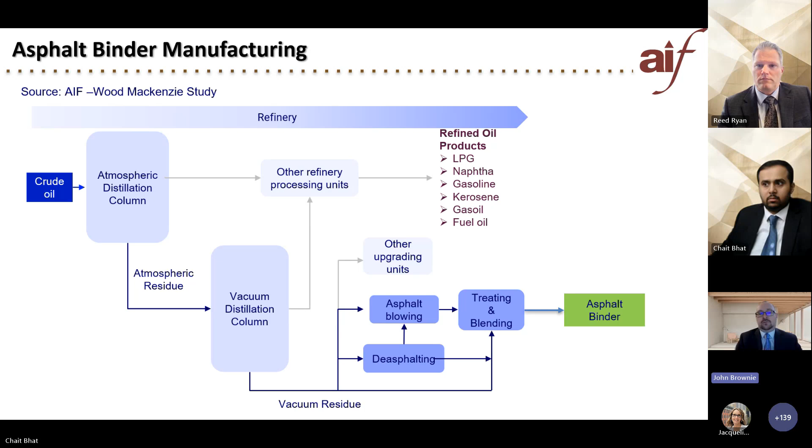And this is a very simplistic view of our, call it cradle to gate within the asphalt refinery for the production of asphalt binder. And I really want to tie into that crude oil piece. So the dynamics of this and the refining industry are tied to the energy transition. So understanding this and understanding crude oil demand and other petroleum product demands is critical to understanding what is required and what the supply scenarios look like for asphalt binder, because it is integrated with the rest of these materials and their uses. So that's critical for this slide and what we do.

Now, switching gears a little bit and talking more specifically about the study, Wood Mackenzie has an energy outlook. And what they have done is they've modeled a base case scenario that takes into account a number of different elements. It takes into account supply and demand elements across various sectors, understanding what technologies exist, what technologies could exist in the future, and what the economics of all of these processes are, and what is required from a carbon emissions standpoint. It uses these to build a base case model and then looks at other scenarios to build out what that energy outlook scenarios look like under those different requirements within the system.

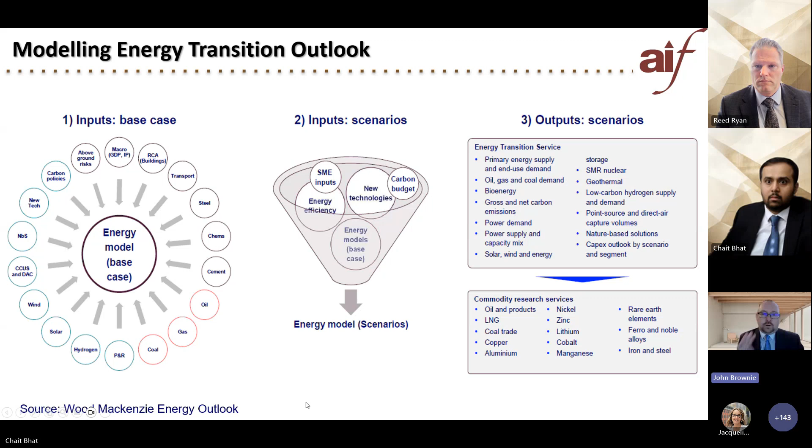Okay. Now, one other element I did want to highlight: in 2023, when we started this study, the Wood Mackenzie Energy Outlook stated that the base case scenario was the most feasible scenario for the energy transition based upon the current realities of the world. More recently, in 2025, there is another scenario that has been generated that is a delayed base case scenario that has a global warming potential limited to 3 degrees Celsius. And that's due to many of the geopolitical tensions that have been generated over the last year and a bit. I'm not going to discuss that in great detail. It wasn't part of the AIF Foundation study, but I did want to put that there as a piece of context for these three scenarios and the likelihood of what transpires over the next number of years out until 2050.

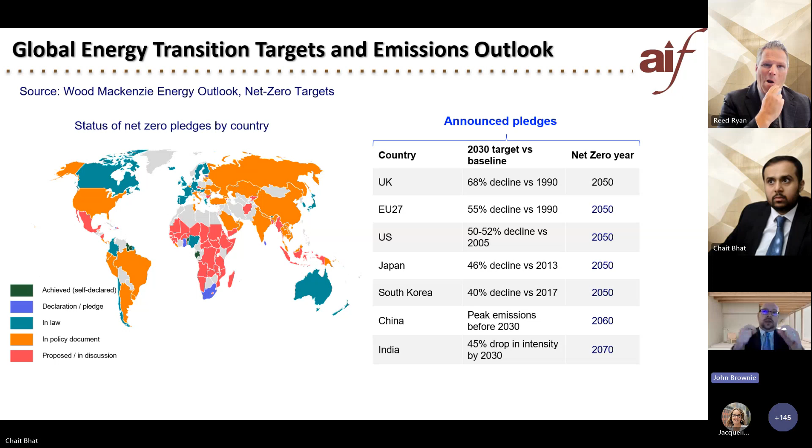We've covered the asphalt binder manufacturing process. And now I want to transition to the outcomes of the energy outlook and what that specifically means to the impact on crude oil demand, by scenario, because again, tying back to what I talked about, crude oil and the refining and petroleum industry is going to be critical to understanding our asphalt binder manufacturing.

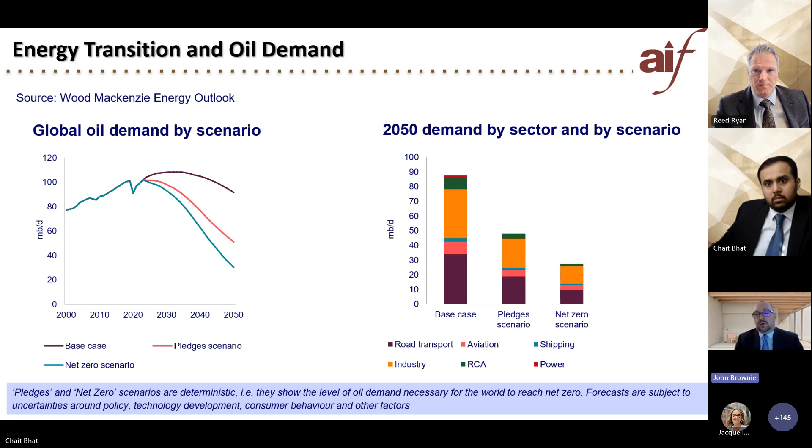And so that changes the fuels demand scenario and lowers that going forward as we change energy sources for the vehicles. But what's really critical to me and for our asphalt industry is that the vehicle fleet continues to grow. So more vehicles, more people and goods to be moved. So we need to maintain and improve our road networks, which ties to the demand scenario of asphalt and asphalt binder production in this study.

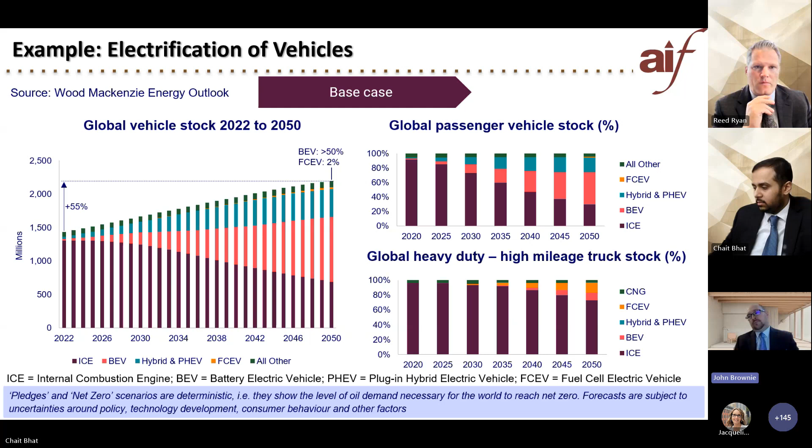And I think that's really the important implication that I want to walk away with, is this is part of the reasoning behind how the energy transition occurs and what the implications are from a petroleum demand perspective in each of the scenarios, but what it means to the road industry.

And that's important to understand what this means for the future of binder supply and the choices that will drive that in the future. Okay. All right.

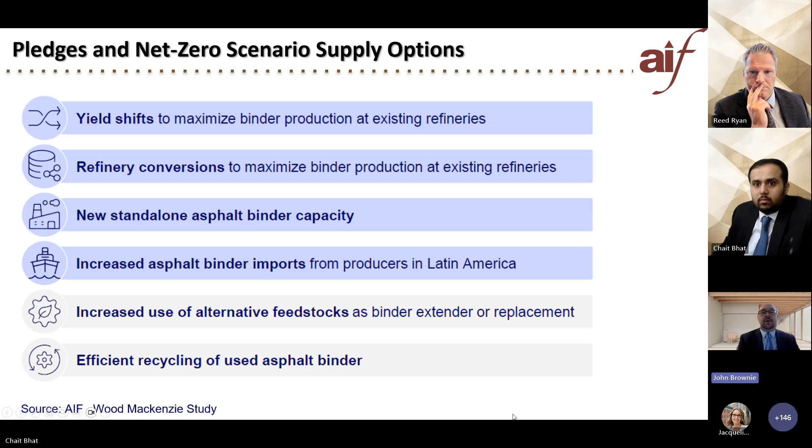So that covers holistically the story of looking at what are the energy transition scenarios. What does that mean to the petroleum crude oil scenario? What does the pace mean for the various scenarios? And then translating that right through to asphalt binder supply under these different scenarios, and understanding then what are the implications for supply versus what exists today, and what would have to happen in the future to allow that to occur.

Chait is now going to take the second portion of the talk that really talks about those scenarios where there is a global warming potential limit. We talked about those in the scenarios. He'll talk about what your choices are around potential carbon emissions from asphalt binder production and use, so going beyond the gate, and what that means under each of the scenarios. So Chait, I'll leave it to you.

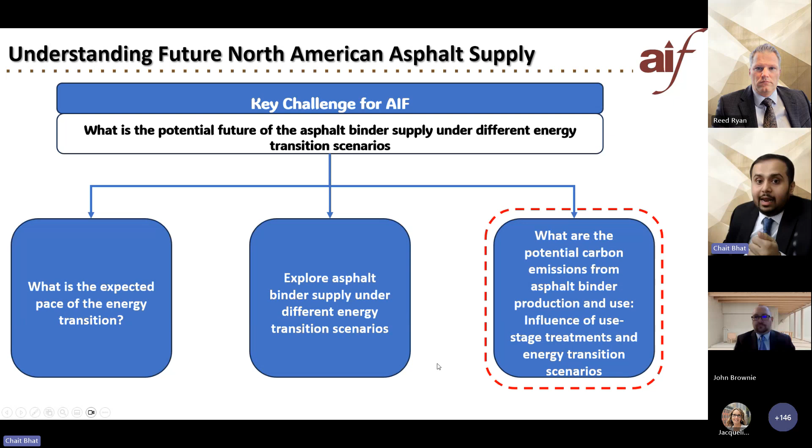However, before going into the actual case studies, let's set some stage because I know there are audience coming from the upstream supply chain participating in this webinar, as well as third-party stakeholders. So for those who might not be familiar with our pavement or road arena, this is what we refer to as a life cycle of a road or a pavement, starting with asphalt pavement, which is our interest here.

As John mentioned, the cradle starts all the way from crude extraction to the transportation to the refineries, and then to terminals, use of various additives like polymers, then to a hot mix asphalt plant where the liquid binder is blended with aggregates at higher temperatures to make it compactable. That's transported by a contractor and laid down. So that might be a new construction. But once it's done, then it's exposed to traffic and climate.

So there is your pavement and vehicle related interaction and the indirect emissions, what we call operational emissions from the actual vehicle use. But then there's also emissions from the maintenance activities. So depending on how bad your road is, a public agency who are the owners of the roads, like the State Departments of Transportation, might decide to do different preservation maintenance treatments to make sure that the road is suitable for users.

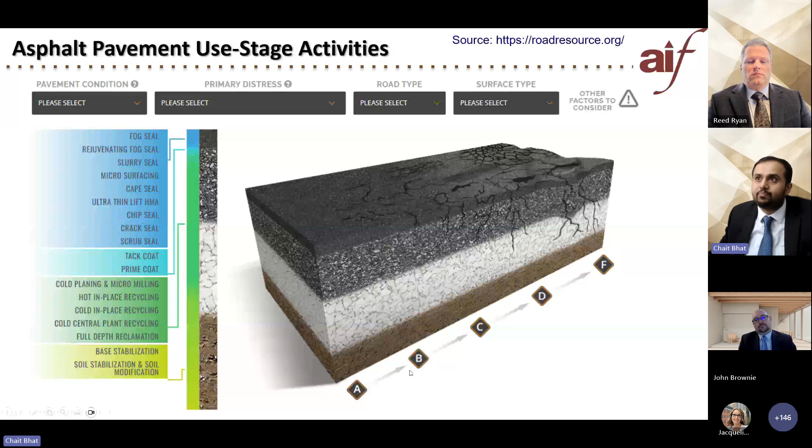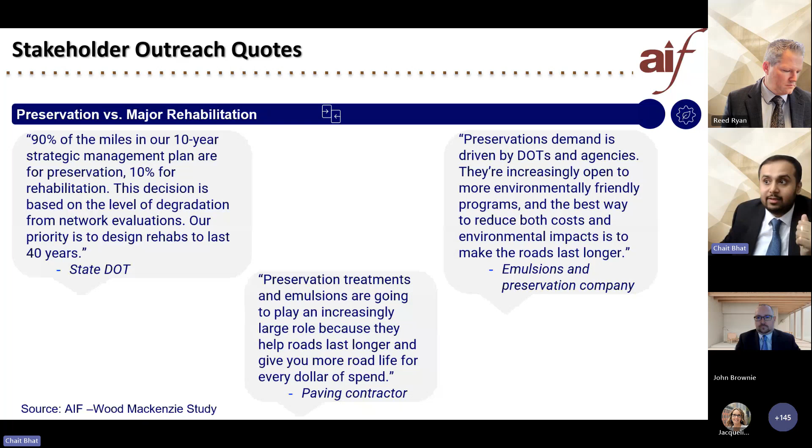Sorry for this busy slide, but this is before going into the numbers, because for me, while doing an LCA, I tell all the students that are currently working on life cycle assessment, don't focus on the end results, focus on the hypothesis and assumptions behind your numbers, right? And for the public agencies that might be listening to this webinar, Asphalt Institute throughout has been supporting context-specific pavement life cycle assessments. What I mean by that is, what might work for your Indiana roads might not work for your California roads, or might not work for your Minnesota roads.

We are doing this kind of pavement LCA as a snapshot in time analysis, and not to say that this is the universal solution. So the owners of the roads at those respective agencies should make sure that this kind of an analysis is done whenever they are trying to incorporate potential carbon emissions within the decision making.

So 3 examples. First example is, I mentioned before that asphalt is the most recycled material, right? Asphalt mixture. So first example is what we typically see within a state agency. Let's say there is a new road construction that happens at year 0, and they wait till, let's say, it fails. Like when I say fails, the whole asphalt surface kind of degrades to like 2 inches, 3 inches, 4 inches. Then they go in and take out that asphalt surface and then pave it back again. That's what we call mill and fill rehabilitation activity.

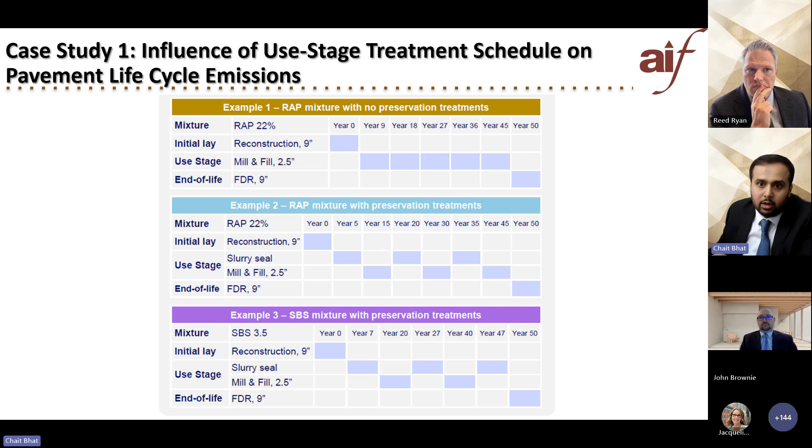So in the third use case, the assumption that we have made there is instead of your slurry seal at year 5, as in example 2, your slurry seal would be at year 7, and your mill and fill would get pushed out to year 20. Looking at these 3, so the previous slide told you about what the agencies are going to be prioritizing, right? In this slide, taking those agency insights, we came up with 3 case studies. So let's see, from an environmental sustainability quantification perspective, is what the agencies are thinking making sense or not? Turns out our public agencies are right.

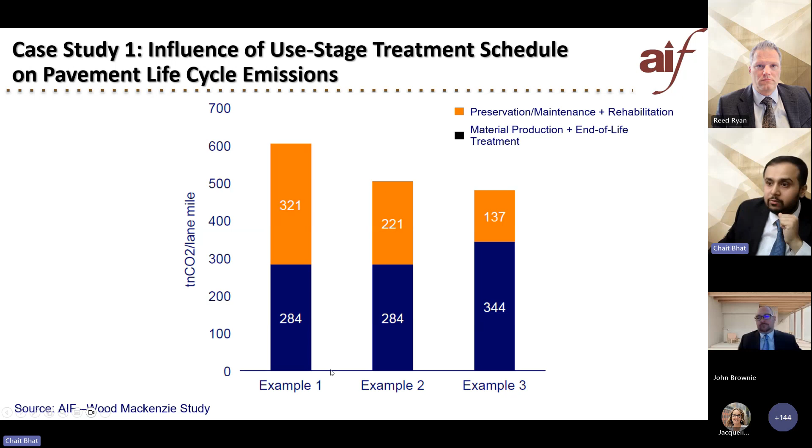But what's to note here is in example 3, the initial material extraction is higher because of the use of that polymer. But what that's doing is in the use stage, it is requiring lesser preservation as well as lesser rehabilitation. So when you look at the cradle to grave emissions, your example 3 turns out to be the most sustainable option, right? So what our public agencies are prioritizing in terms of preservation and longer life seems to be the right option, even from an environmental sustainability quantification perspective. So that's case study 1.

Case study 2, John talked about 3 different energy transition scenarios, right? So within the 3 examples that we talked about before, let's take example 2, where we are using 22% RAP asphalt mixture, slurry seal at year 5, using the existing practices of asphalt binder production and use.

All the fuels are the same, all the construction equipments are the same. This is what we get. 505 is the overall cradle to grave emissions. Another key thing to notice here is your use stage is the predominant contributor when you look at your cradle to grave. We are still not including the operational carbons. This is just the use stage from the actual treatments, but that's what your number looks like.

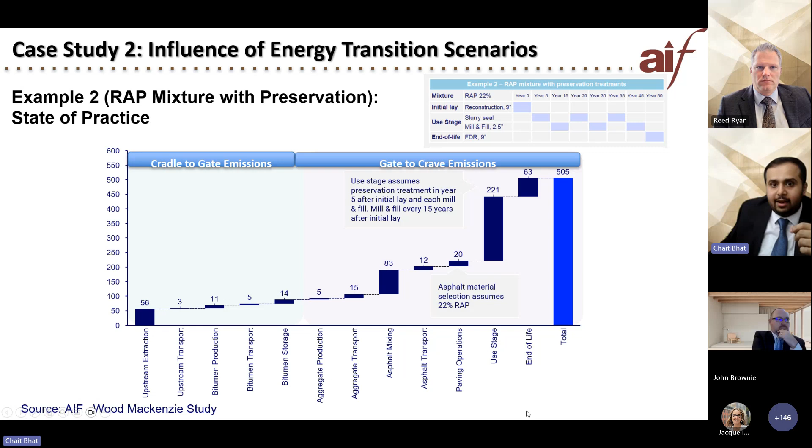Now, when I do a prospective life cycle assessment, in order to do that, let's first look at assumptions, right? Now, energy transition scenarios in the pledges case, net zero case, what are those things that will change? There are two portions to it. One is during the asphalt binder production, all the way from your crude extraction to your refining to your terminal. So during those, things like electrification of your platforms of crude extraction, as well as drilling equipment, use of carbon capture sequestration technologies, or from Canadian oil sands, let's say if they are using some solvents, all of these, Wood Mackenzie projected, will reduce the carbon emissions.

Now, during the use, that is mixing with aggregate as well as paving it and then maintaining it, there are multiple options there as well. One thing I would mention here is each of these options, not everything is of the same feasibility level, right? Each of them need different economic incentives, different technical feasibilities. For the sake of our analysis, these are the options we are considering to see how much are we able to reduce from the state of the practice for that example 2.

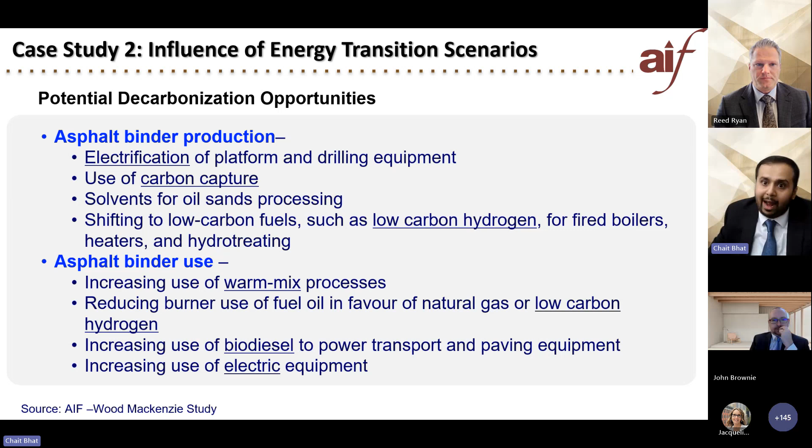In this very busy slide, the things to actually take from it is, if I do just the base case, so Wood Mackenzie told us that base case is the most likely scenario, right? From the asphalt supply perspective, we are still able to reduce up to 24% of emissions. And that's from your technological innovations in your crude extraction all the way to your grave. But when you look at the net zero, from all the options we talked in the previous slide, we can reduce up to 58%.

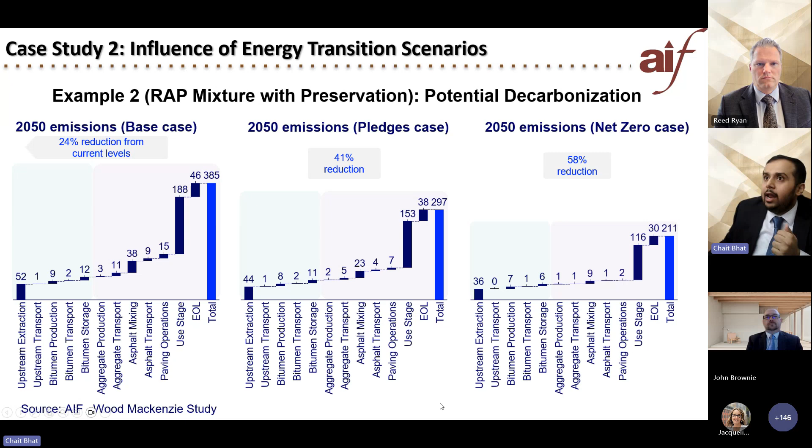Now, one thing that I will mention here is we have not considered the use of any bio-based additives in our analysis that contain biogenic carbon. So for our snapshot in time analysis, we considered everything that was standardized as of now, for which material specifications are standardized and practice is standardized. So in future, if there are any bio-based additives that are used, that might reduce the number more. But from our analysis, this is what we see from a cradle to grave perspective, the potential emission reductions. I'll now pass on to Reed to conclude our presentation.

Thanks, Chait. I appreciate that. And as we have this slide up here for everyone and we review what's been presented to us today, I think there are some fundamental assumptions that we can make as far as concluding thoughts. I want to get to a few of those in just a moment and ask a few questions before we get to that. But here you have an understanding that the base case is our most likely scenario that was closely examined. That asphalt binder will remain in demand throughout this transition and shift, and that the supply should remain relatively stable under that base case scenario, which I think is good news for all of us.

And now the opportunity lies with refiners, right? When we talk about upstream, about what their choices are before them. And obviously the economics of all of that will drive those decisions. But the good news for us is that, as John mentioned in his portion of the presentation, we still are part of a world that relies on roads, and those roads play an integral part. And asphalt obviously plays over a 90% part in the construction of most of those roads, when you consider 94% of the roads are built in asphalt in the United States. So the converse of all of that is, can we do better? Can we continue to progress as an industry?

And Chait really took that by the reins and laid out for us various things to consider when it comes to our carbon emissions. And there you have some of that data presented before you. So the key takeaway for me in all of this is that it takes all of us. It's an interesting thought as I ponder this, 2% of the barrel, that so much in that 2% is driven by 100% of our industry, and all of the things that we do together collectively, from the design and engineering to the construction to the use to the preservation and maintenance, and then to the recyclability of the product, of which we have all made our careers, and all that we consider with that.

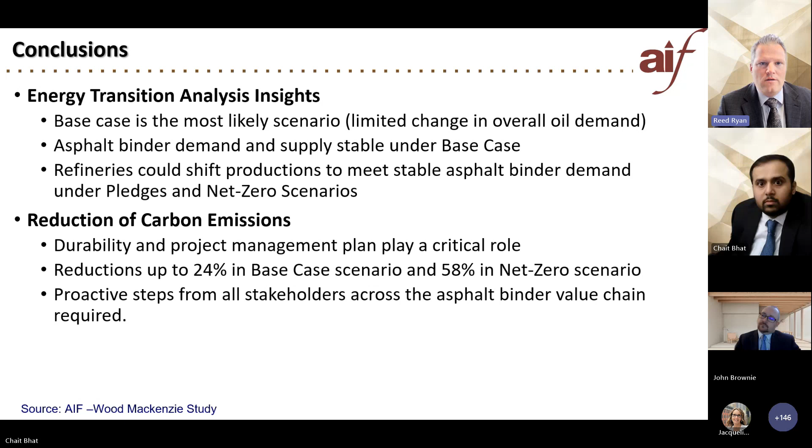The takeaway for me is that it will take all of us. And this is the opportunity that I think has been presented to us. So John and Chait, I'd love to defer to you if you have any additional concluding thoughts. Otherwise, I'm going to talk a little bit about some questions that Jacqueline has helped supply over to me as you were speaking, and then we can take it from there if you all want to share a thought or two, and then I'll ask you a couple questions.

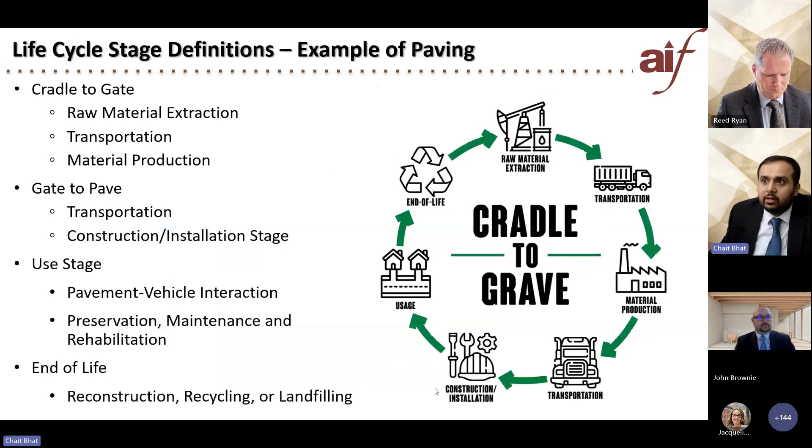No, Reed, just one thing to add, and John clearly elaborated it. The main metric to consider, and I'll go back to that slide here within the three scenarios, is the economic feasibility and the amount of incentives required, right? So the ever-evolving market, what we see here is you would need like $55 trillion for your base case. And for your true net zero case, you'll need like 78 trillion. And that's cumulative investment between 2024 to 2050 by all countries globally.

To give a context of what that looks like GDP-wise, US's GDP was 23 trillion in 2023. And for a country like India, where I originally come from, it's 3 trillion. So Wood Mackenzie's projections are based on the economic feasibilities as well as the technical innovations that are parallel to those feasibilities. So that's very important for us to note. So John, if you had anything to add to that, yeah.

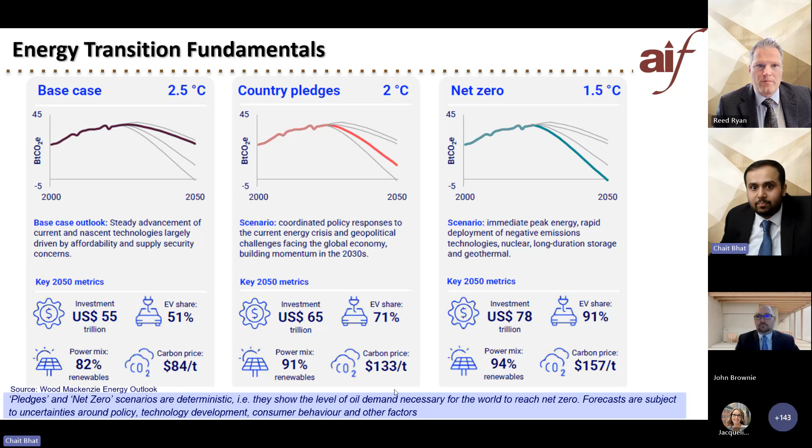Nothing to add. Awesome. John, if you will, I'm going to try to logically order these questions as best I can. I do my best to be a good moderator. As mentioned, Chait made me dress up today, so I feel even more important with a suit and tie on here. But I'm going to try to do a good job. I'm going to try to get these in a logical order as we've had a few questions come in.

So why did the study consider energy transition as the starting point? John, you have a lot of perspective. You've dedicated a lot of time both through AI and through the foundation. You're here representing those thoughts, as a member of those organizations. Why start here, with the energy transition as a starting point?

Well, I think that's going to fundamentally change what the energy picture looks like in the future, right? I talked a little bit about the tie of asphalt binder to petroleum refining and to crude oil, and all of those things are interlinked. So to really understand what the world looks like in these different scenarios, you need to start there. You need to understand the energy outlook. You need to understand how those energy needs are going to be met. And then you can translate that back through the system into the end product like asphalt. So I think that's really why you've got to look at these scenarios and why asphalt binder is so linked to the energy transition.

Thanks. And this is a good related follow-up question that's here on the Q&A. So I had mentioned Wood Mackenzie, why that selection was made, for reputation and the quality of the partnership. And that was, I think, evident in what has been supplied here today. But how closely, John, do you feel that aligns with what else you're seeing in terms of the projections, like let's say the International Energy Agency and others? Do you feel, as a respected professional in this industry, that you're seeing this elsewhere, that there's momentum towards this or an understanding towards this? If you could provide some perspective.